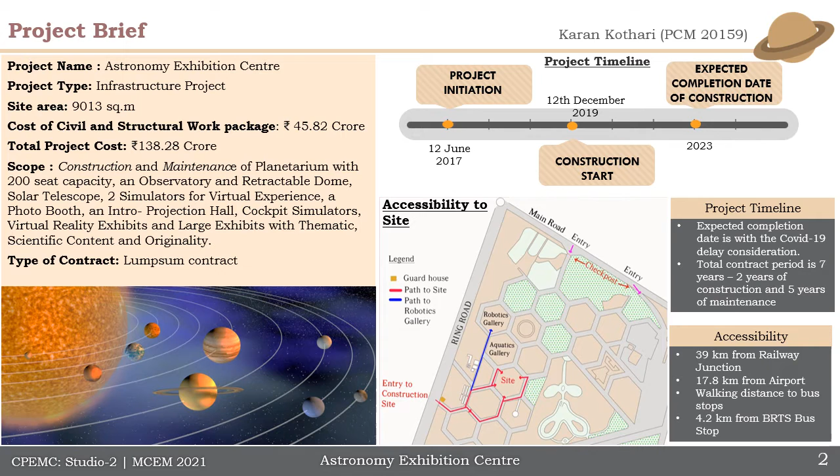Coming to the project brief, the name of our project is Astronomy Exhibition Center, which has a total project cost of 138.28 crores, and the scope includes the construction and maintenance of a planetarium with 200 seating capacity. The project was initiated on 12 June 2017, construction started on 12 December 2019 and is expected to complete in 2023. The contract period is 7 years, with 2 years of construction and 5 years of maintenance, and it is easily accessible from the railway station, airport, and bus stops.

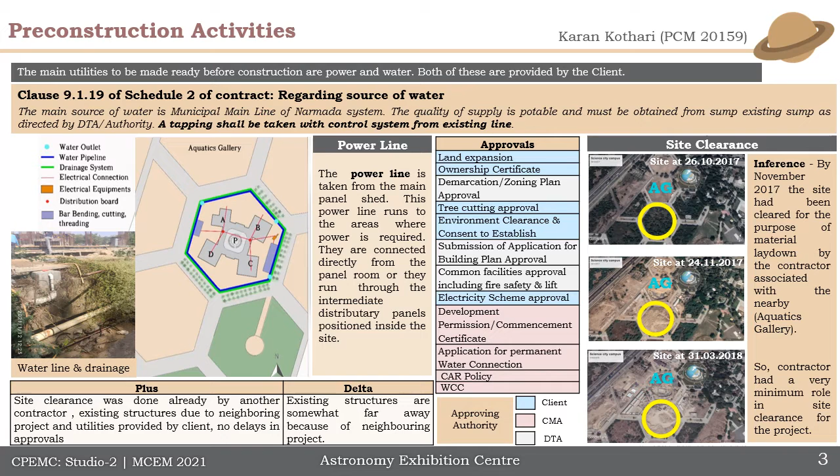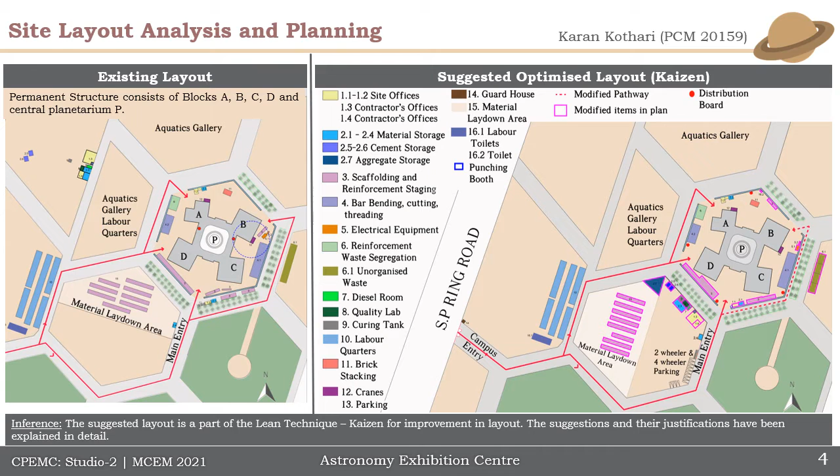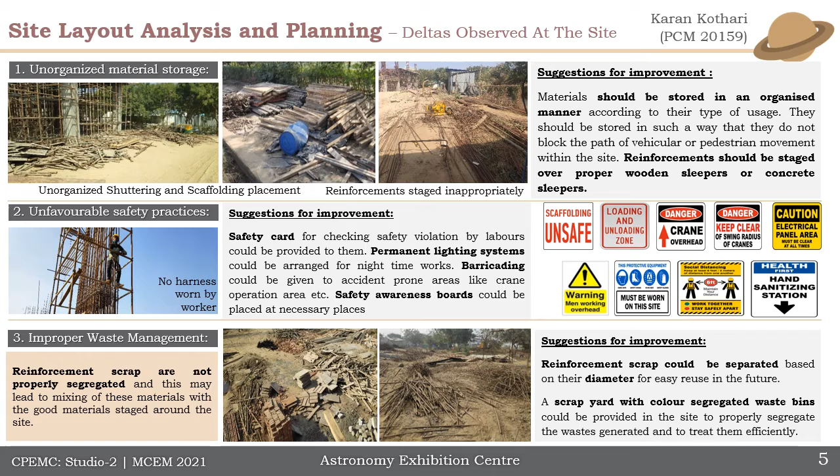Unorganized material storage was observed on site, for which we suggested that it should be stored in an organized manner and reinforcement should be staged over proper wooden sleepers. Unfavorable safety practices were observed, for which safety cards, permanent lighting systems, barricading, safety awareness boards, etc. should be provided. Improper waste management was observed, as the reinforcement scraps were not properly segregated. So reinforcement scrap could be separated based on diameter, and a scrap yard with color segregated waste bins should be provided.

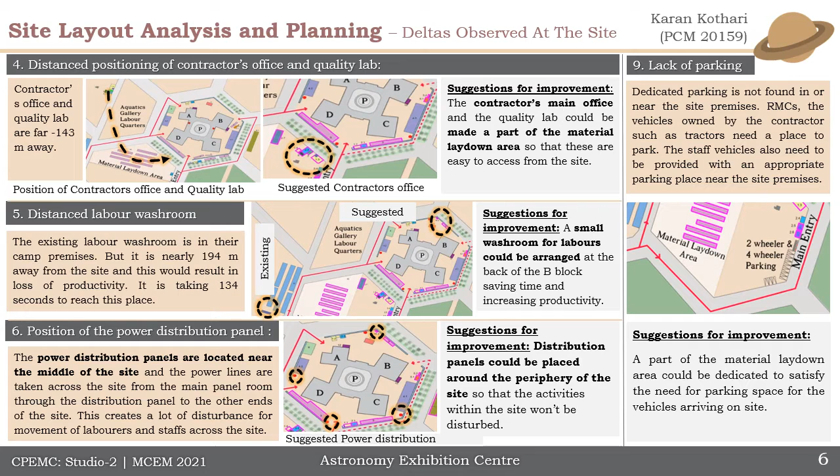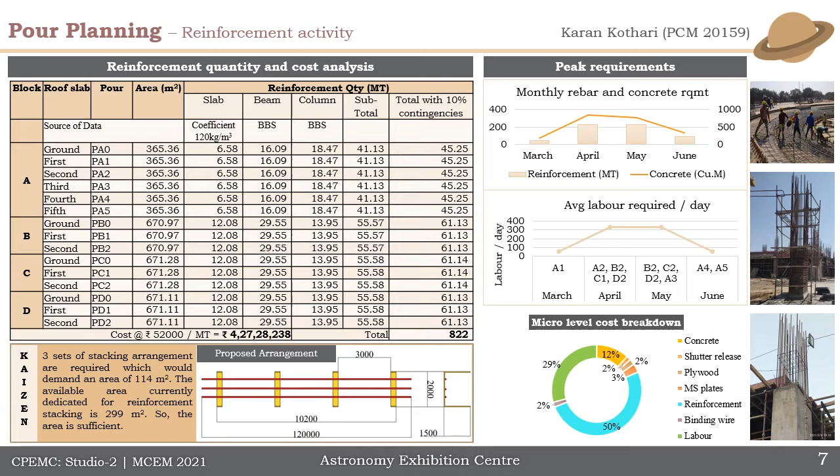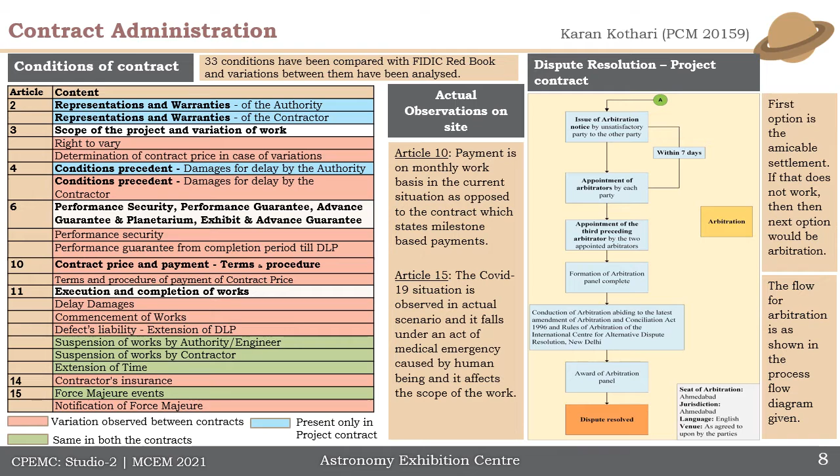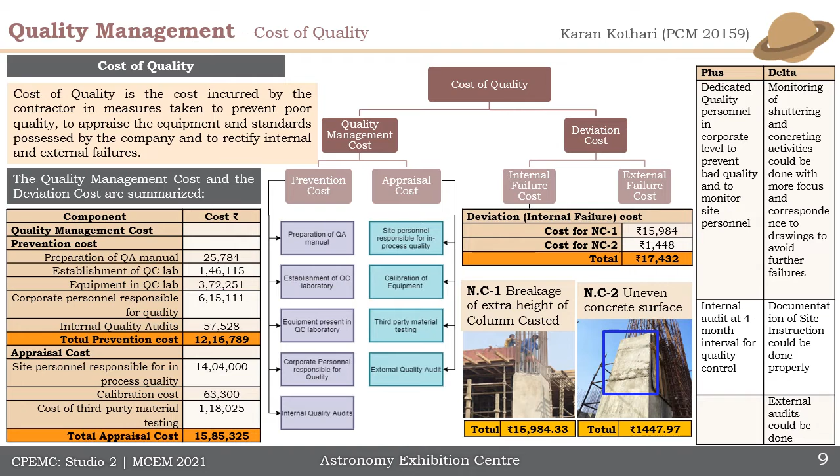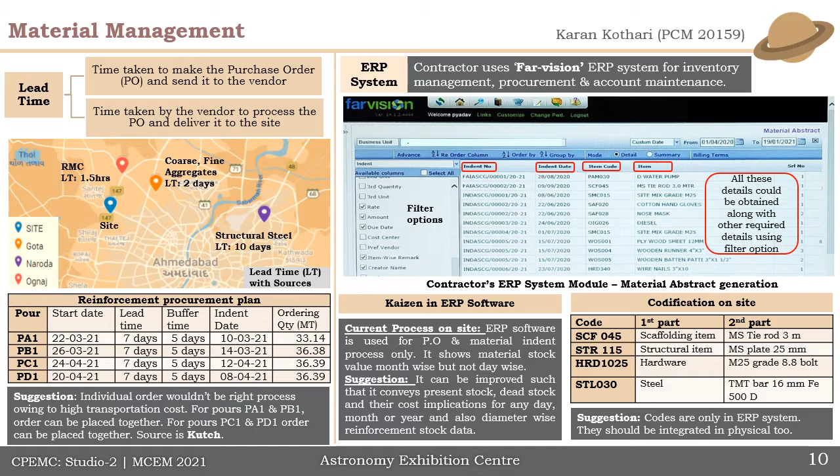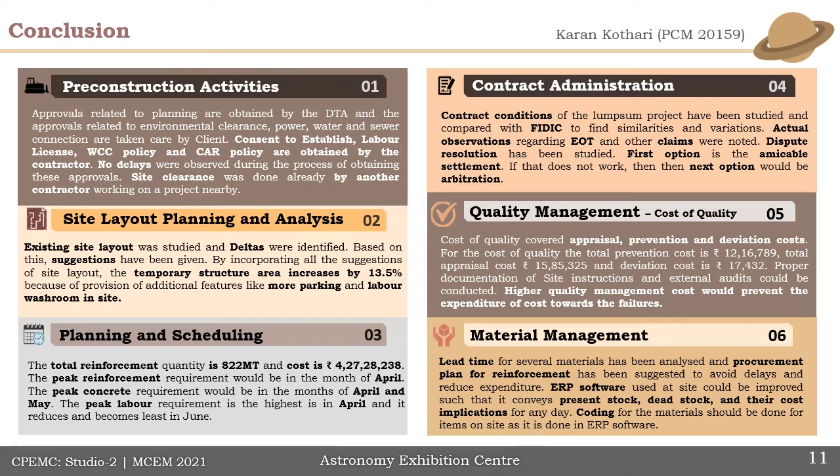In quality management, the cost of quality covered appraisal, prevention, and deviation cost, and higher quality management cost would prevent expenditure towards failure. Under material management, lead time for several materials has been analyzed, and a procurement plan for reinforcement has been suggested. The ERP software used at site could be improved such that it conveys present stock, dead stock, and cost implications. And coding should be done for the items on site as it is done in the ERP software. Thank you.